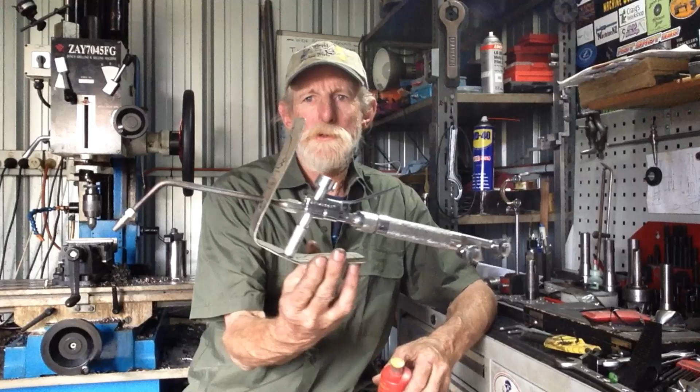Well, today we're going to do something a little bit different. So we're going to have a play with our Eutalloy torch that we picked up the other week. So we bought this totally unknown condition, sight unseen, at an auction. The price was right, so I thought I'd take a gamble on it. But it does have a few issues, as I found out. I'll explain later in the video.

In here is a little rubber powder control valve, and that needs to be replaced, but we can't get one here in Australia. They're unavailable. It's an obsolete part, so I'm hoping I can get hold of someone over in the States, and they might be able to help me track one down over there at a major Eutalloy agent. So anyway, that's enough of me. So let's head over to the welding bench and we'll get our torch coupled up to the oxy, and we'll have a look at our broken part we're going to repair.

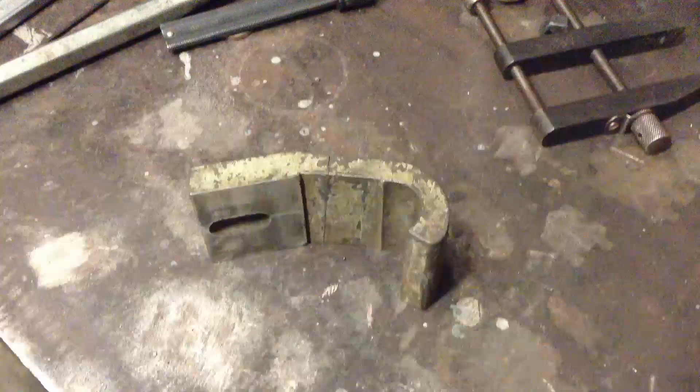So the repair we've got to do is on this part here. This is off one of my lathes, and this is a support for the bar that runs underneath the lead screw, and the bar operates the carriage stops on the lathe. So as you can see, it's broken. It's had a bump at some stage, so it was like this when I bought the lathe. So what we're going to do is repair it.

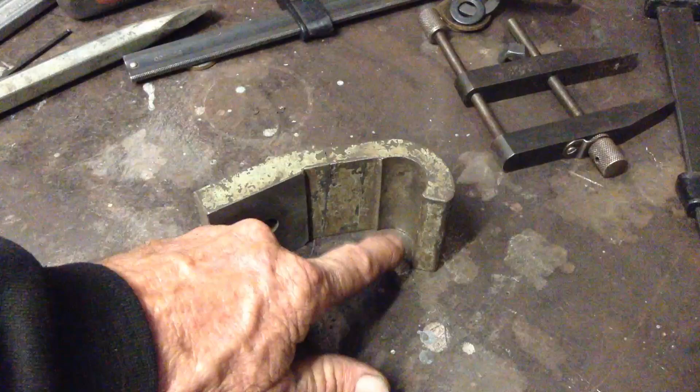So we're going to need a jig to hold it in the correct position, so we don't lose our centre distance between where the bar sits and where the bracket mounts up to the lathe. So I've knocked up this ugly bracket. This is the ugliest welding fixture on the planet, but it will serve our purpose well. So we'll get the part mounted up in it, and then we'll V it out ready for weld prep. Okay, so we'll get all this lot together.

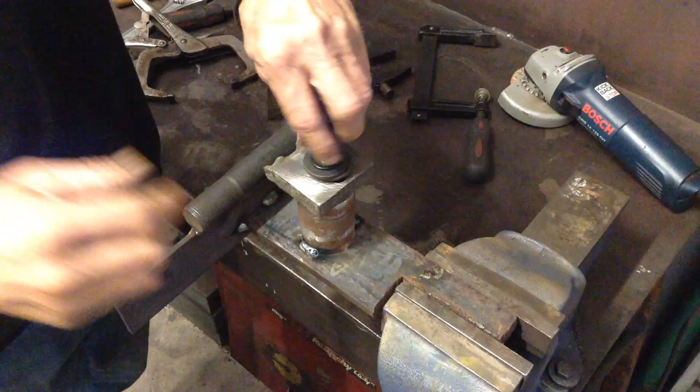So it's machined on the underside, so everything's all held nice and square. We'll just sit that loosely in position there, and then our mating part sits on here. We just bring them together. And we can feel on the crack that we are holding in the right location. And give him a nip down.

Still holding our thumb pressure on here, and we'll put a clamp quite tight on here like that. Now I should probably put a support under there, which I might do. Okay, so we're in location. Our gap's completely closed up around our crack. So now what we can do is V out and prep our crack.

What I might actually do is, with the MIG, I know it's cast iron, I'll just put a couple of tacks on here just to help key it in a little bit better.

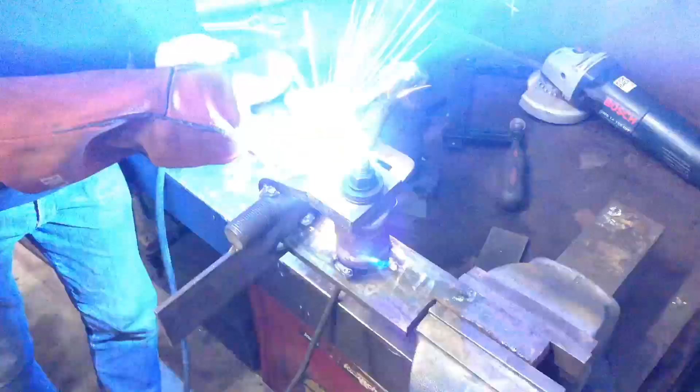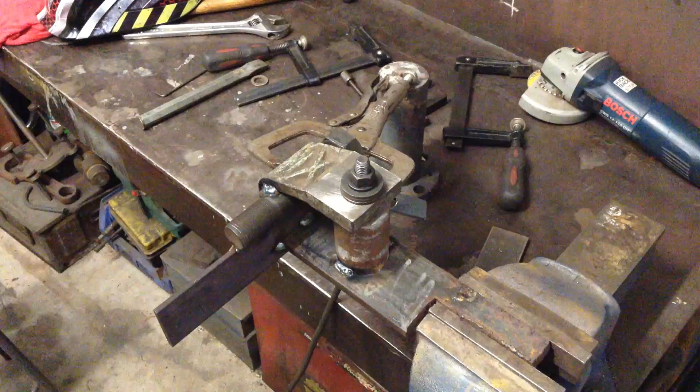Okay, so we've got a couple of good tacks on either side. I know it's not the correct method, but it may just help key it in and keep it in position a bit more. So what we're going to do now is we'll V this crack out, and then we'll fire up the Eutalloy torch and get our crack repaired.

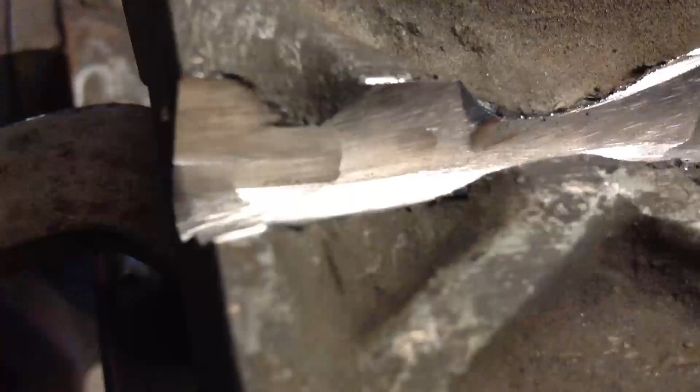I don't think the camera will pick it up, but I'll show you a close-up of trying to follow this crack. Okay, that's a piece of the crack running through there. It's very difficult to pick up. The easiest way is if I ran the oxy torch along now, we might get a defined crack, something that shows up a bit clearer.

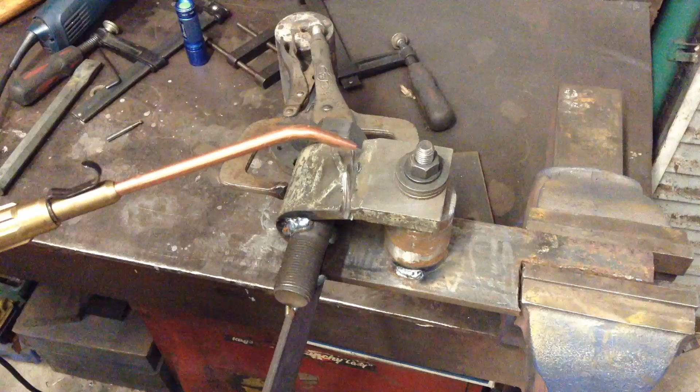So we're just going to put a bit of gentle heat in here, and hopefully it'll give us a better idea where the edge of the crack is. I'm starting to lose it a bit there. You can just see a couple of spots, it's hard to see it all. Okay, that's...

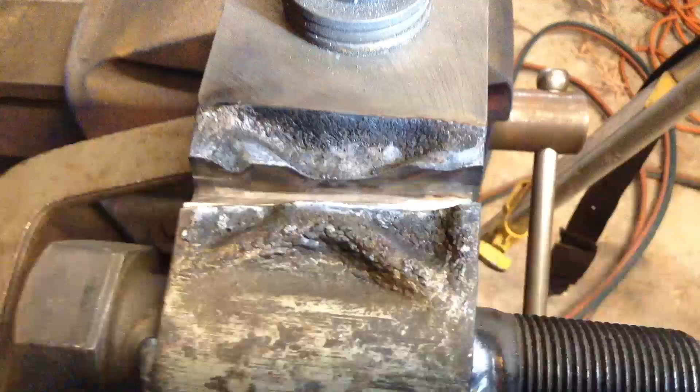Okay, I'll swing you around so you can see what I see, but now I've got a definite idea where to grind. Okay, you can see the edge of our crack running down there, comes up here, and then along the bottom corner there, where that dark line is. So that's the edge of our crack.

So I think we'll continue taking this out, but I'm going to swap over to the Dremel now. Okay, so I think we'll go for something a bit more heavy duty than the Dremel. The old electric die grinder.

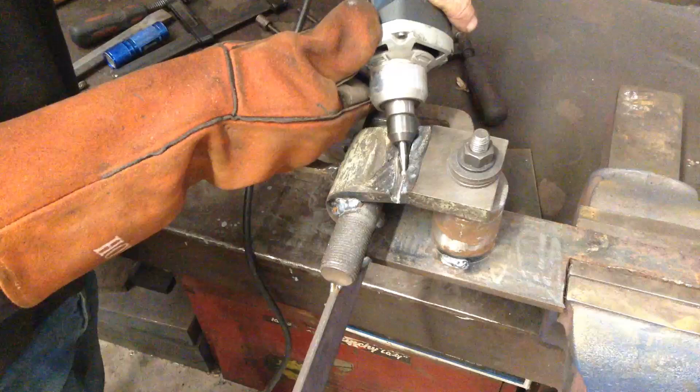So I can vaguely see portions of the crack, so I'll just give that a bit more heat to make sure we are actually following the right track. Okay, we're right on it, so I'll swing you down and give you a look at what I can see.

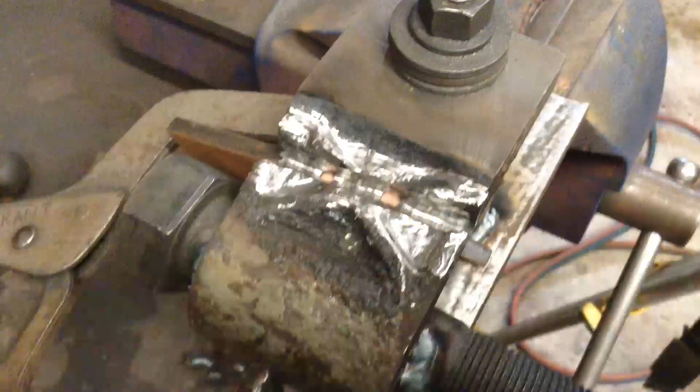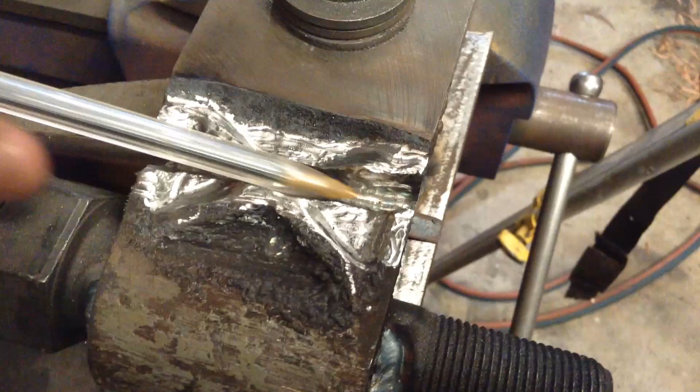So we've got our whole groove all cleaned up now. A couple of spots got a bit thin, so we've just got a copper backing plate in there just to back them up, and we've cleaned up all around the surrounding area, even at the sides where we did with the grinder. We've dusted over that with the rotary burr,

and that's just the way I've been taught not to weld on a ground finish on cast iron, and I think aluminium's the same. Its main reason, as far as I'm aware, is so you don't get impurities from the grinding wheel contaminating the weld. So that's given us a good clean area to weld. So we'll get the Eutalloy torch cranked up now, and we'll start filling this in.

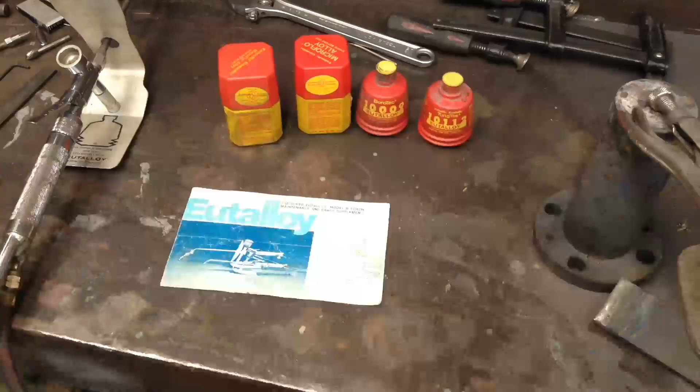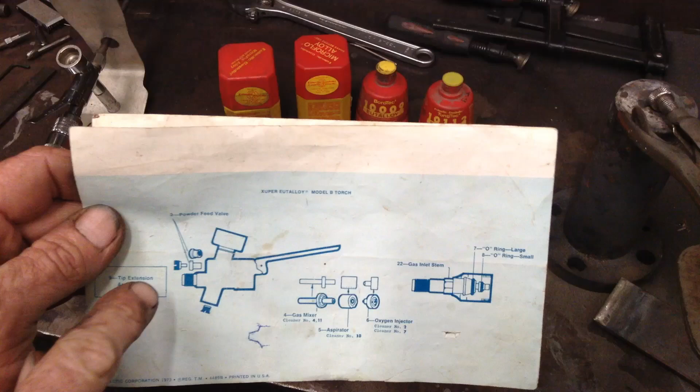Okay, so we'll just give you a quick overview of the torch that I picked up. So it has a partial bit of a booklet with it. It just has a bit of a breakdown in there on the cleaning process, what parts you pull apart, which are there, and what parts you don't pull apart, which is the powder feed valve. You never touch that one.

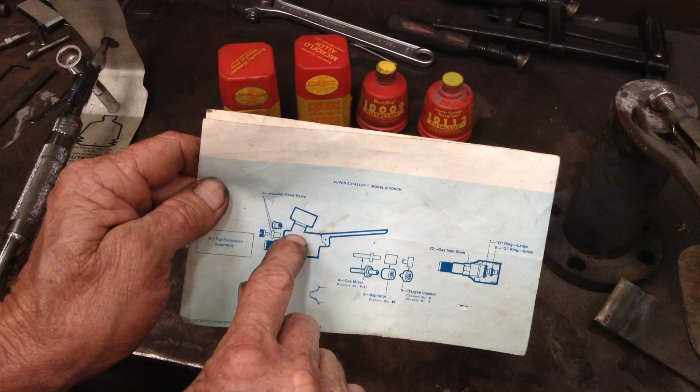Now my torch has had a problem. I've just done a temporary fix on it, and there was a problem in the powder feed valve, and that's just a rubber valve with a little pinhole through it and a diaphragm on either side of the pinhole, and the plunger operates off the end of the trigger and squeezes the diaphragm shut, which squeezes shut the pinhole and stops the flow of powder coming down and out the nozzle of the torch.

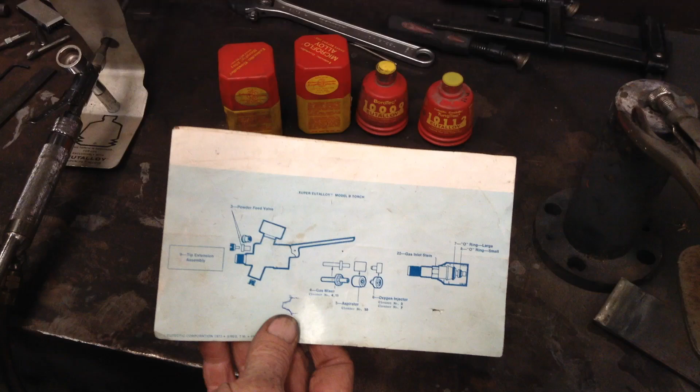But I've done a temporary repair on that. Now I'm going to have to try and chase one up from the USA because we can't get them here in Australia. So hopefully it'll hold out for this job. And yeah, the three other parts there, just the gas mixer, the aspirator, and the oxygen injector, you pull those apart just for cleaning.

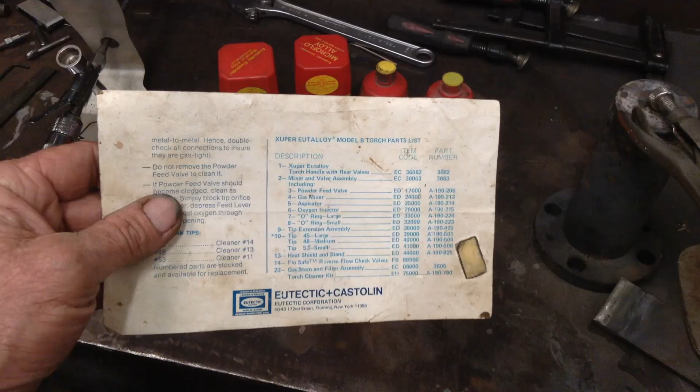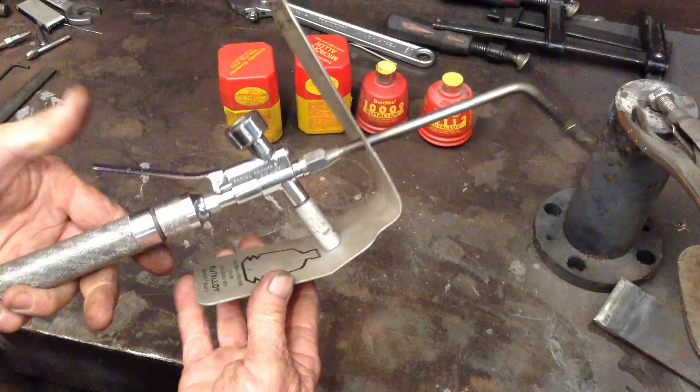There's a bit of a parts list on the back, so it was handy getting this booklet with the torch kit. Now these don't pop up very often over here because they are quite old. So there's your torch. The mixer is basically similar to your standard oxy mixer, very similar. Of course your powder bottle, there's a bayonet fitting which goes on the top there, a bit of a heat shield, and your trigger to allow the powder through.

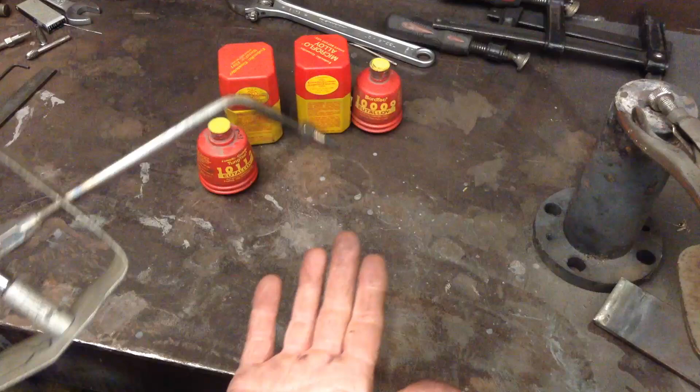So you crank the torch up, you get your part to a dull red, and what you want to do then, because there's issues with oxidization, you want to waft a quick bit of powder over the area you're going to weld as soon as you've reached that dull red temperature, and that will help seal the surface of the part you're welding against oxidization. So yeah, and the trigger to allow the powder through. So we'll get the torch fired up and we'll see how she goes.

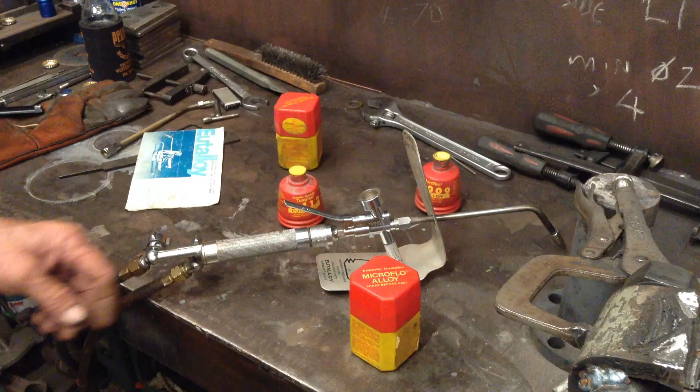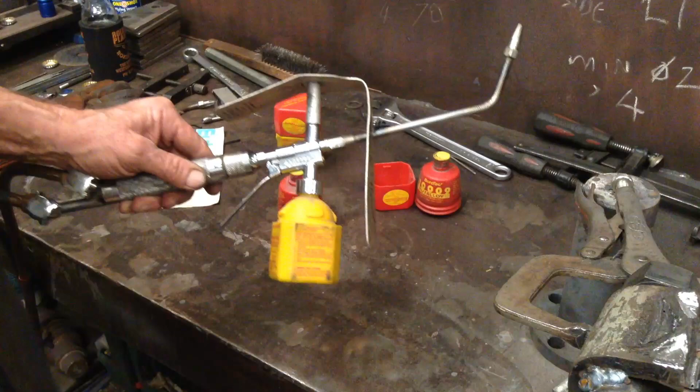Okay, to mount the powder into the torch, just take the lid off the powder, invert the torch upside down, and find the bayonet spot. It's just a small twist and she's in. Okay, so we'll give it some preheat.

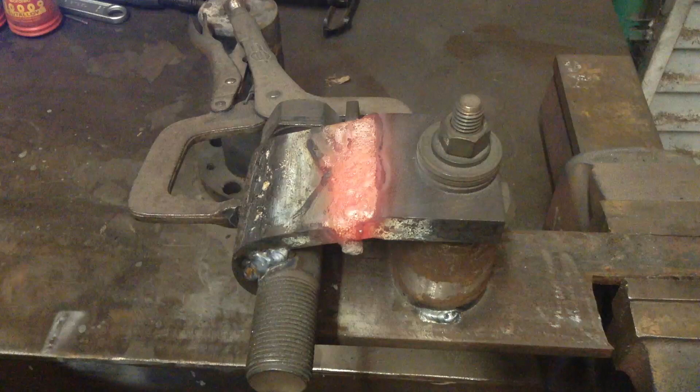So we'll let that cool down. We'll wrap that up in a welding blanket. And we'll have a look at it when it cools down.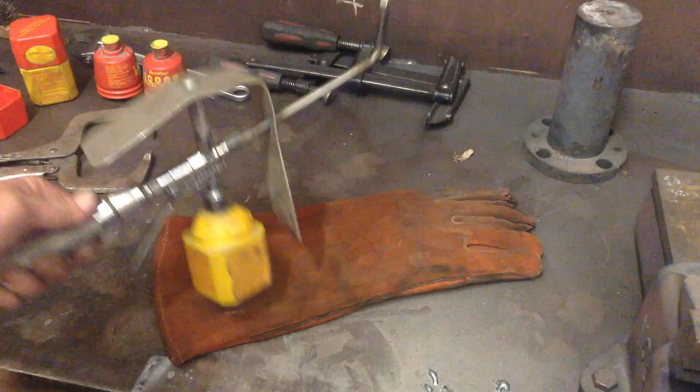So once your welding's complete, all you need to do is invert the torch, give it a couple of taps, unscrew the bottle, and then what you want to do is put the tip just on a welding glove, open up your oxygen, and have a look at what comes out here. Just the little puff of powder comes out, and that's all you normally would do to clean your torch.

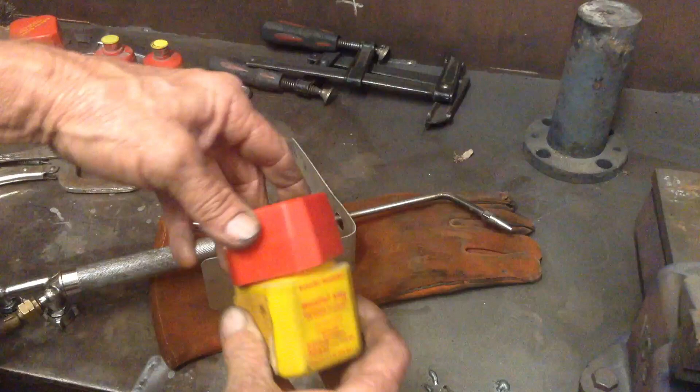And then keep the lid on the powder, make sure they don't hang around in a damp place because they'll start to solidify a little bit. They've got to be kept in a warm place. Anyway, we'll go and have a look at our part once it's cooled down.

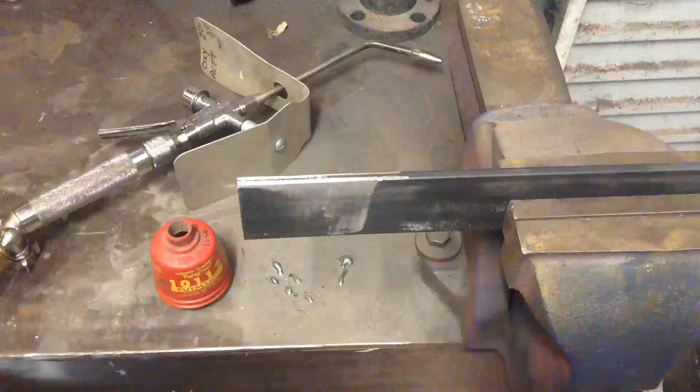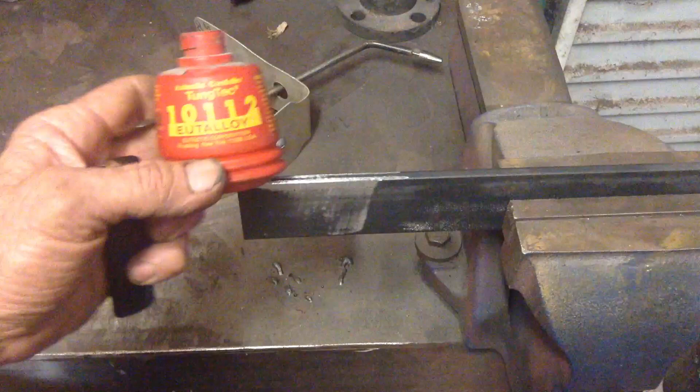We'll just try a different powder. This is just a bit of 50x6 flat bar. So we'll just do a run along the edge there. So this is 10112. This is a non-machinable, very hard powder for hard wearing surfaces. So I'll give this one a crack.

So we'll run a file over that. You'll see how hard this stuff is. File just skates off it. So that's a very high wearing compound, that one. So there, yeah, that's the 10112.

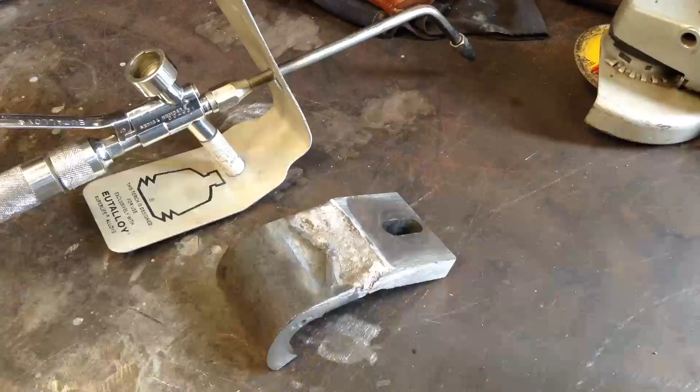This is a very light coating we've put on there. Well, okay, we've released it from our jig that was to hold it together. It's not too bad. You can see a little bit of where it's got a bit warm up here. Now all that's due to having to run the torch at higher pressures than what I should be running it at for the size nozzle we are using.

Now I've had to do that because inside this section of the torch just here is the spray control valve, and had to do that temporary repair as we mentioned before. I mean, it is working, but I do have to run the torch at higher pressures for it to be a bit more effective, so that's a bit unfortunate. So yeah, we will be tracking one of those down from the USA because they're not available here in Australia.

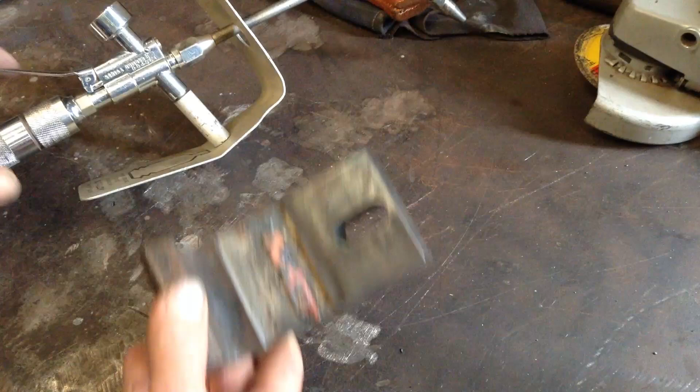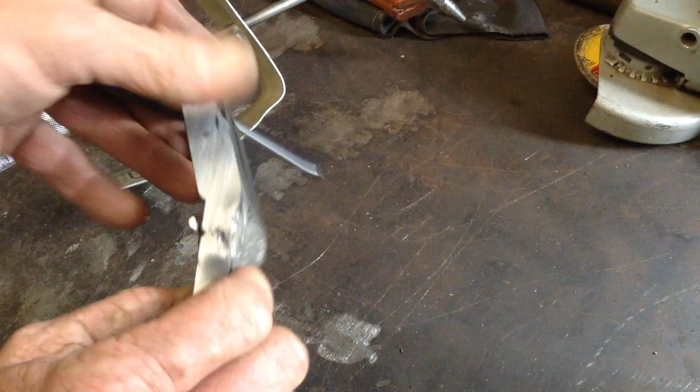So what we'll do now, we turn the part over, we'll peel off our copper backing strip, and we'll just back grind till we get some clean material. So we'll be grinding into our spray from this side, and we'll just do a run along the back, and there's a little bit to touch up on the corners there, and I think we'll just do a run just to tidy this top bit up over here. So let's get set back up.

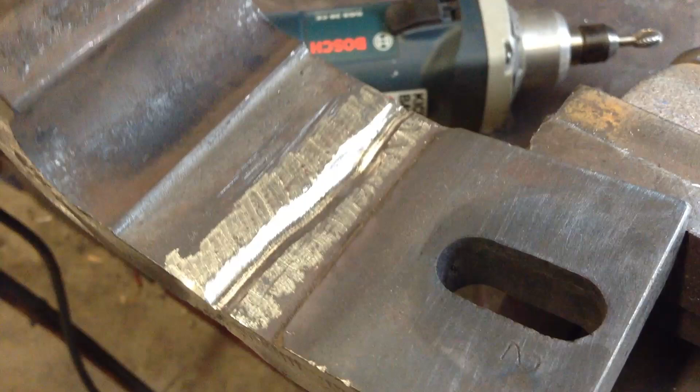So this is with our copper backing strip removed. So you can see this section there, it's absolutely perfect, but it's stuck to the copper up here. So yeah, it's a bit unfortunate. If it was all like that, we wouldn't do anything with it. So we'll go as we said, and we'll grind this out, we'll do the other run. But yeah, here it's absolutely perfect. So we've back ground the underside of the part, which has all come up nice and clean, no inclusions or anything. So we'll get the torch fired up and fill this slot in.

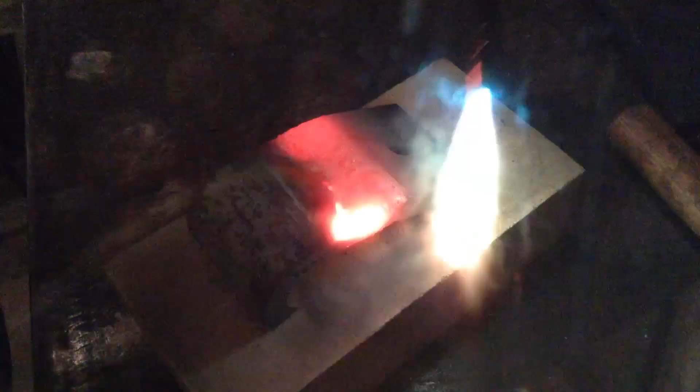Okay, we'll let that cool off and I'll get this wrapped up in the welding blanket. Well, that's the back of the part, what we've just done. A few little dingleberries on there, but that's come out rather well considering the torch was playing up. Still a bit warm to touch, and our other area, that's fine. So I'll get this cleaned up and bring you back.

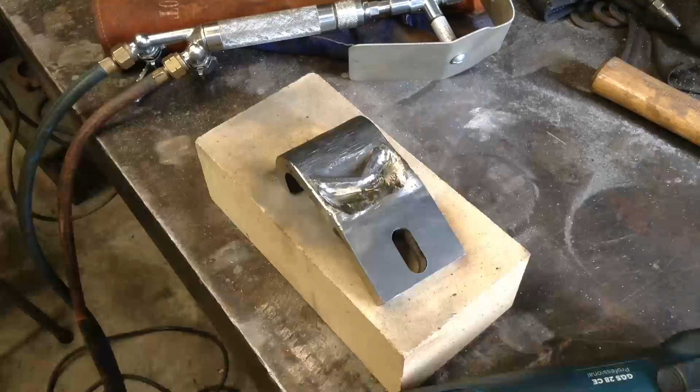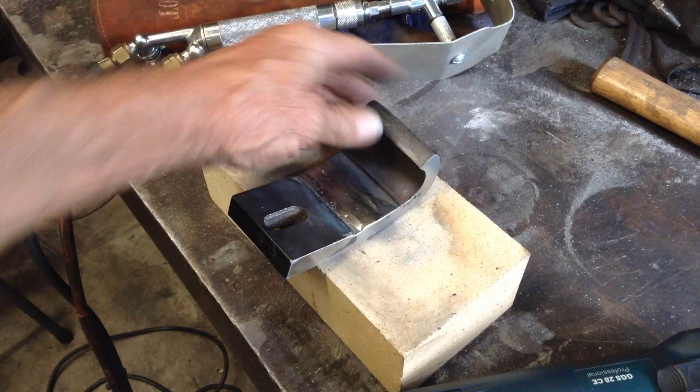Well, after a quick clean up with the rotary burr, she's come up very well. So yeah, the spray is a nickel alloy. I just tried to blend that in with the rotary burr as best I can to its original shape. So there you have it. Ready to go back in the service.

Okay, we got through that okay, so our part came out very well in the end, very happy with it. So the powder we used was a nickel alloy powder, and absolutely brilliant for build-ups and welding cast iron, such as this part off my other lathe that you guys haven't seen yet. So now with the Eutalloy torch, and of course it's powder, these can be used for, depending on which powder you use, if you want to do like a hard non-wearable build-up on thinner section parts or whatever, absolutely brilliant for that. Welding small cast iron things.

When it comes to welding cast iron, you've got to make your own decision, because as you know, there's three major ways which we commonly do cast, which is bronze, cast iron rods, and this is the other way. So it's like horses for courses. They all have their best applications. So anyway, our part came out well. So what we'll do is once I get this spray powder control valve sorted out, we'll move on. We'll do a couple of armatures and see how it goes with that.